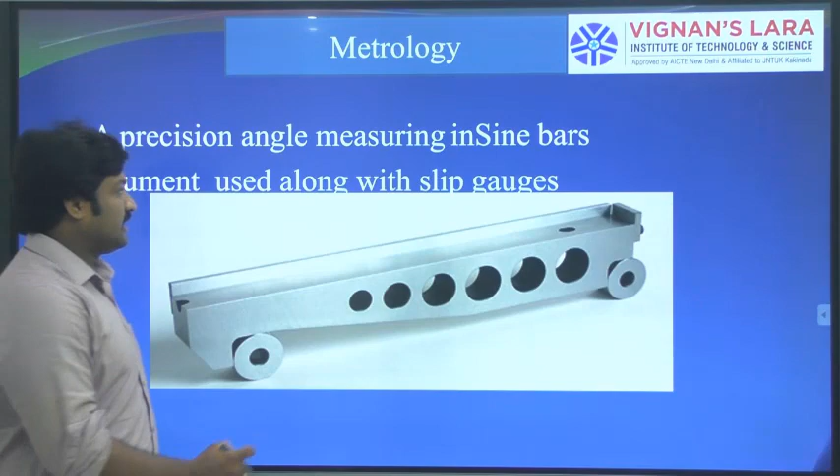This is the upper surface, the surface on which our workpiece is going to be placed, depending upon the application. If the workpiece is small, the workpiece is placed on top of this sine bar.

If the component is big, then we will place this sine bar on top of the component. So depending on the size of the workpiece, the sine bar can be placed on top, or the workpiece can be placed on the sine bar.

This consists of an upper surface, which is smooth, and this upper surface is parallel to the axis of the rollers. These two rollers should be in their axis, and that axis should be parallel to the upper surface. There are also end surfaces and side faces, with the lower surface of our workpiece.

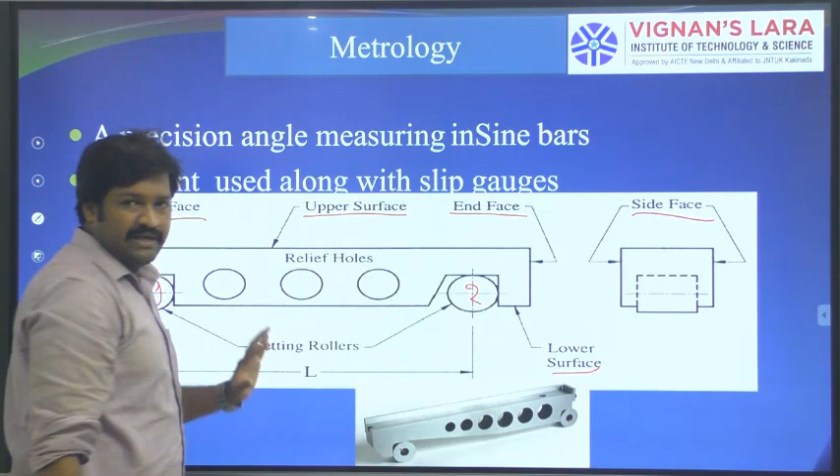So mainly we will focus only on the rollers and the upper surface of our sine bar. The sine bar is a precision angular measuring instrument used for measuring angles and to locate the workpiece or job at a required angle very accurately.

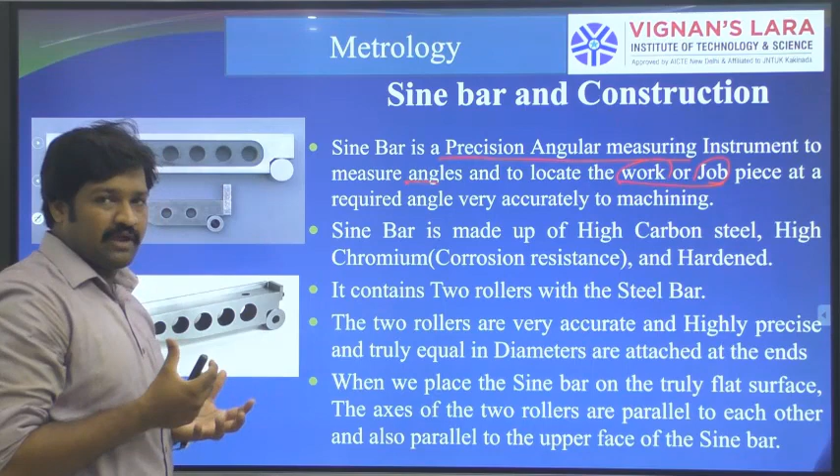Sometimes we need to place our workpiece in tables, meaning vices or clamps. For machining, we need to place our tools as well as workpiece. For setting those jobs, meaning setting up the work pieces, those are to be correctly aligned with respect to angle - that is done by means of sine bars.

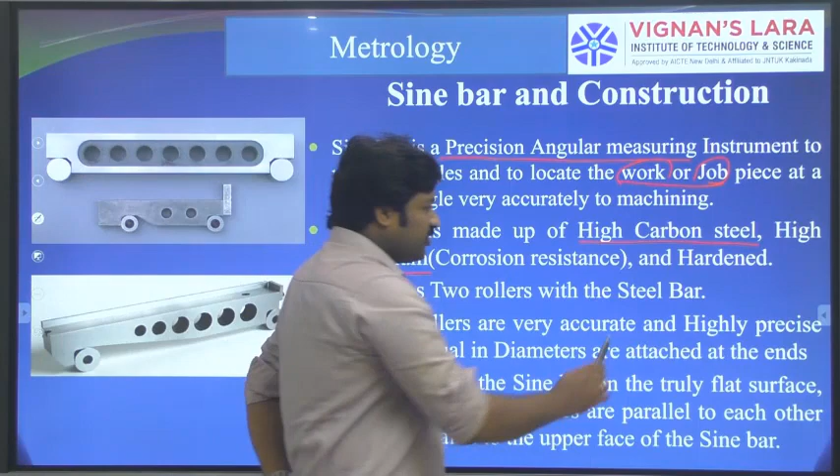So sine bar is made up of high carbon steel, high chromium, and hardened. As we know, if any component is exposed to wear and tear during operation, rubbing action might take place. If our components are exposed to such operations, then we go for heat treatment process, that is hardening process, to improve the wear resistance of the component.

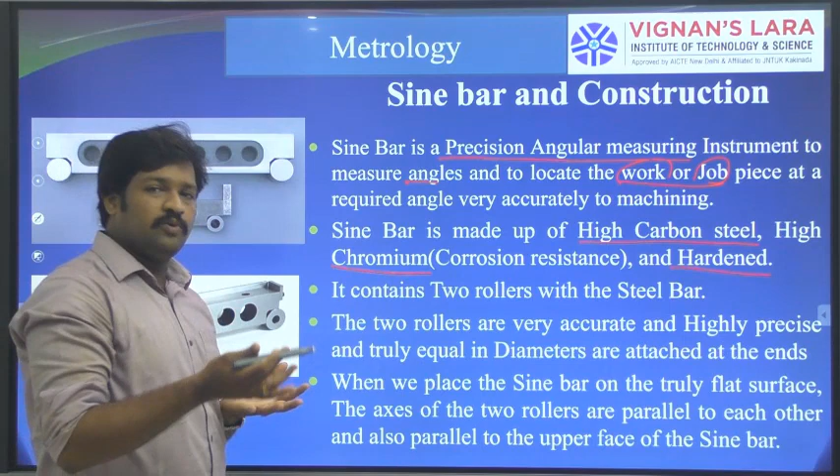And chromium has high corrosion resistance. So to improve its wear resistance, we use these materials. Next, it consists of two rollers, steel rollers on the steel bar.

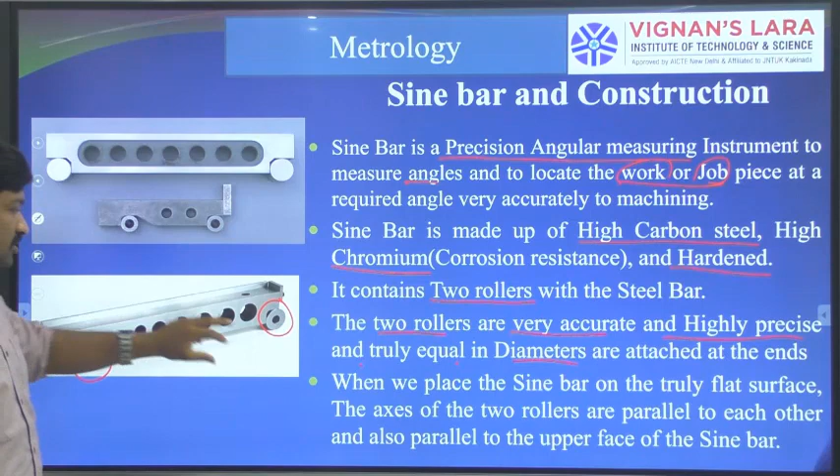The two rollers are very accurate and highly precise, and truly equal in diameter. These rollers can be adjusted depending on the sine bar. So if we are adjusting or replacing the rollers, then the two rollers should be equal - that's the condition.

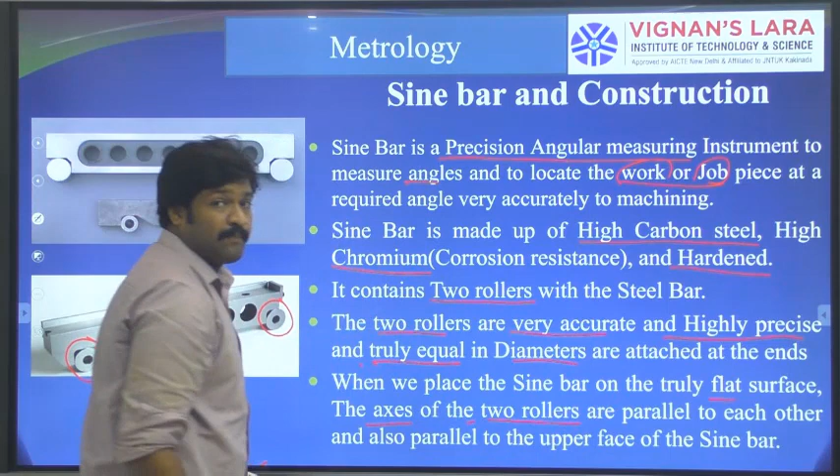So along with being very accurate and precise, they are truly equal in diameter and attached at the ends. These two rollers should have equal diameter. When we place the sine bar on a truly flat surface, the axis of the two rollers are parallel to each other.

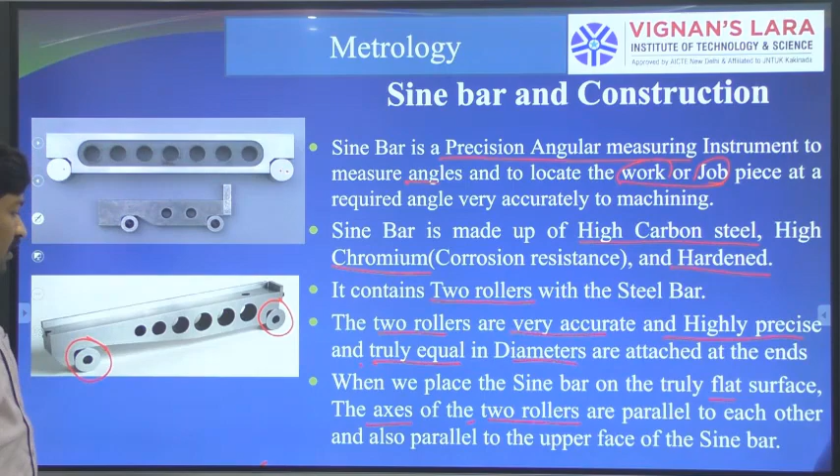So these two axes should be parallel to each other, and along with these two axes, should also be parallel to the upper surface of the sine bar.

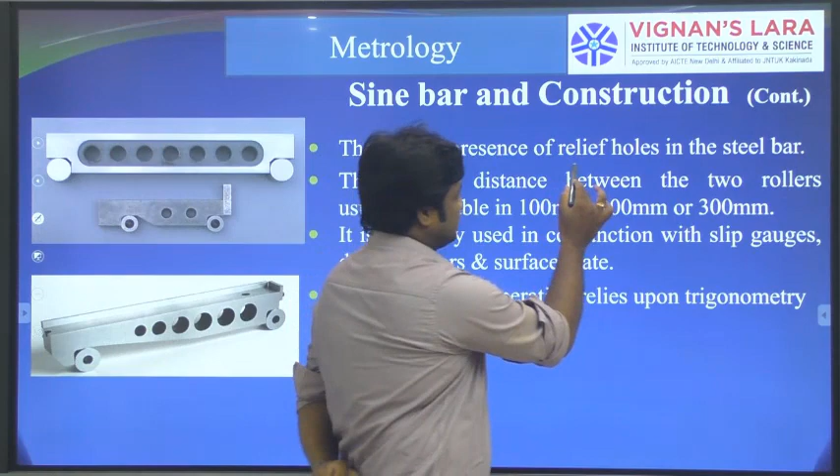There is a presence of relief holes in the steel bar. If you observe, there are some holes. These holes are called relief holes, and the purpose of these relief holes is to reduce the weight of the component.

The purpose of these holes is to reduce the weight of the component. Next, the normal distance between the two rollers is available in 100 mm, 200 mm, and 300 mm.

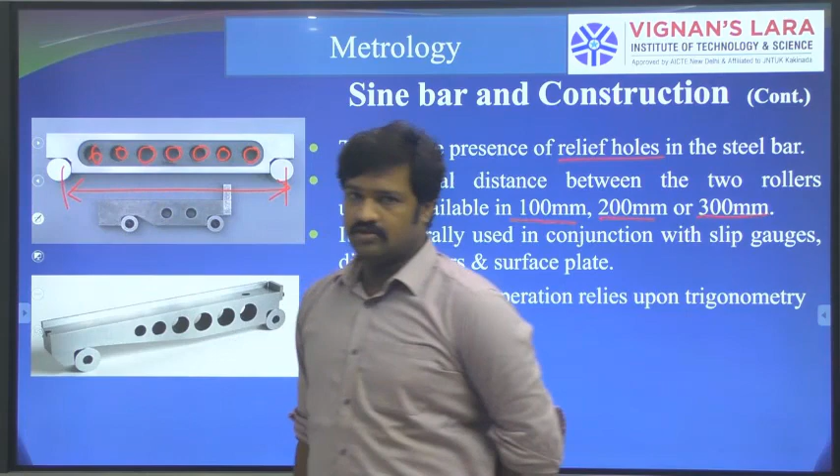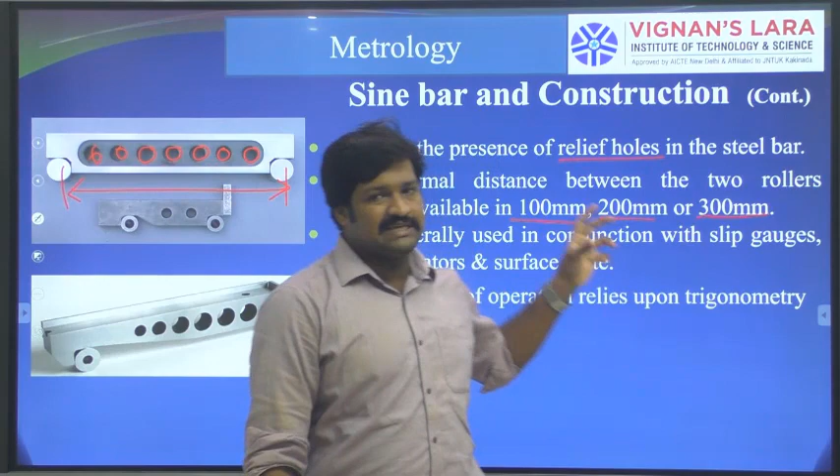The distance between these two rollers is fixed, and those are available in the standard lengths of 100 mm, 200 mm, and 300 mm. Depending upon the application, it means depending upon the size of the workpiece or job, we will select these standard sine bars, whether it is 100, 200, or 300.

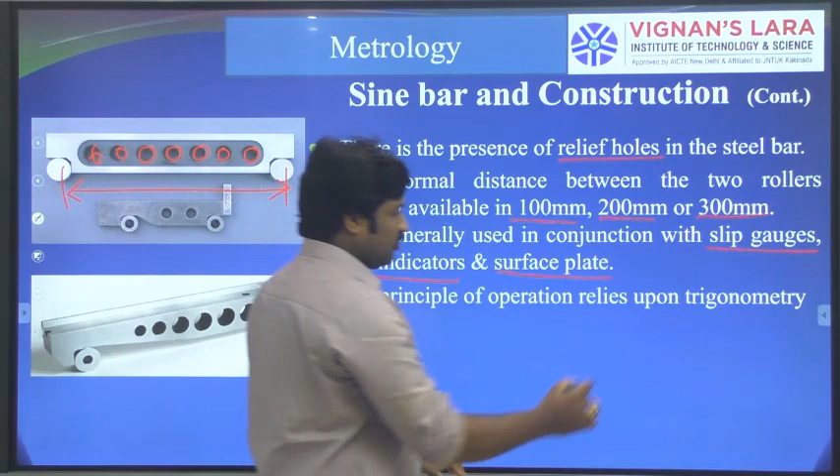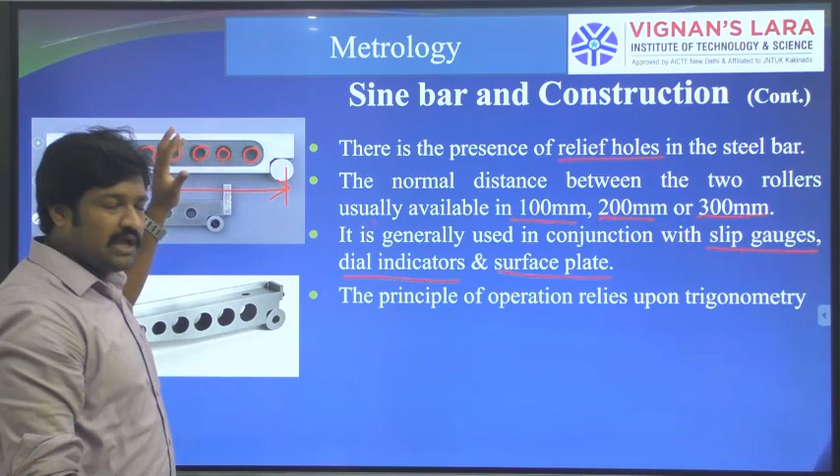Next, it is generally used in conjunction with slip gauges, dial indicators, and surface plates. So if we want to use the sine bar, along with it we need to use these slip gauges, dial indicators, and surface plate also. In conjunction with these slip gauges, dial indicators, and surface plate only, we can measure the angle of the job by means of this sine bar.

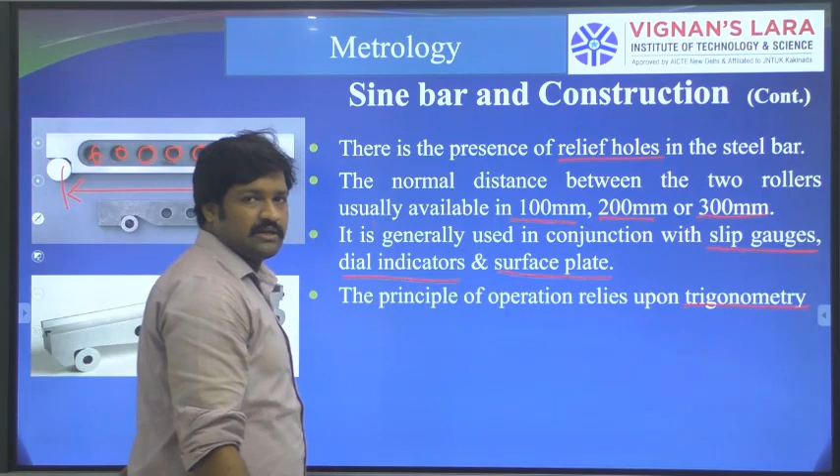The principle of operation relies upon trigonometry. As we know, trigonometry includes sin theta, cos theta, tan theta. So the principle of this operation depends upon these trigonometric equations. The principle of operation of the sine bar is based upon trigonometry.

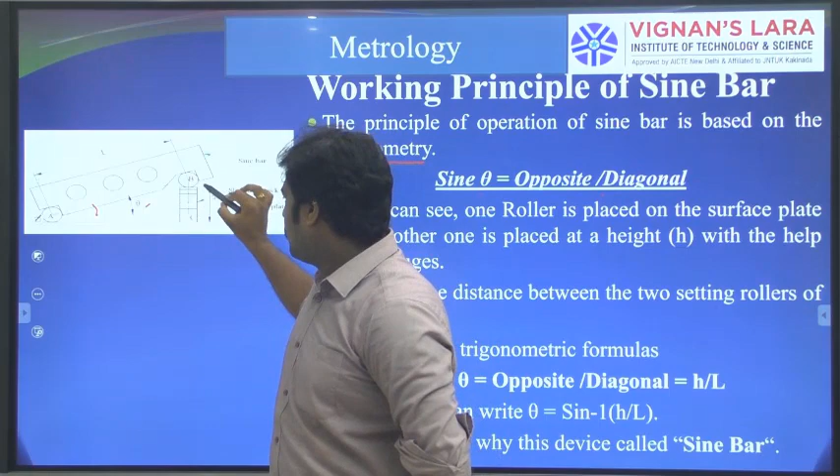That is, sin theta equal to opposite side by hypotenuse. So here, if we want to identify theta, sin theta equals opposite side, that is B to C, which is the distance divided by the length of our sine bar.

The length of the sine bar, L, is fixed. It might be 100, 200, or 300. So L is fixed, and we can select any value depending upon the job: 100, 200, or 300.

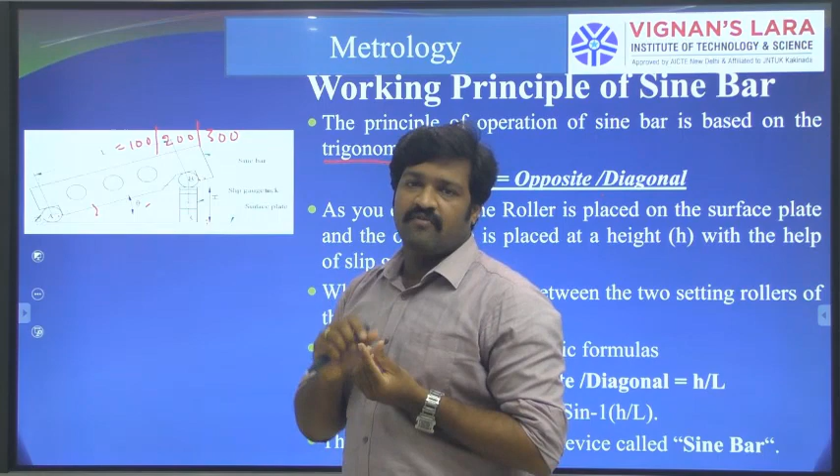The height depends upon the number of slip gauges. This height can be achieved by stacking the slip gauges. As we know, every slip gauge has its number marked, meaning the thickness is marked on one of the faces of the slip gauge. If we join n number of slip gauges, we can sum them all and mention that as the height.

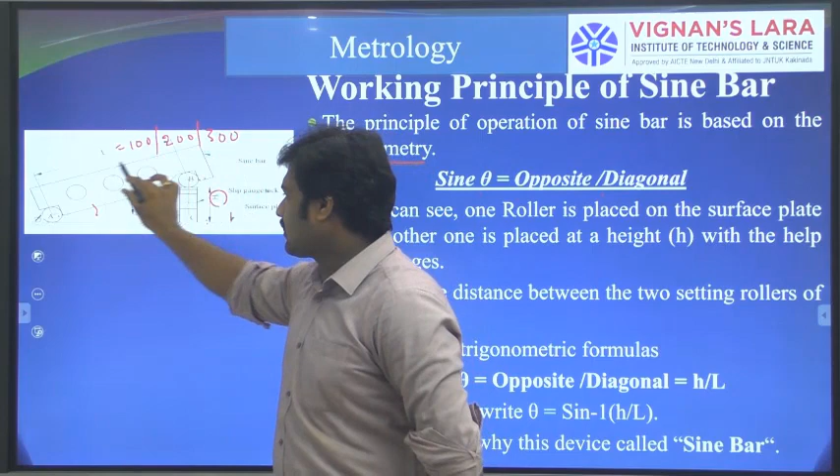Therefore, sin theta equals opposite side, that is the length of the slip blocks, divided by the total length of our sine bar, that is h by L. Sin theta equals opposite side by hypotenuse or diagonal.

As you can see, one roller is placed on the surface plate. Earlier we discussed that the sine bar can be used in conjunction with a surface plate, slip gauges, and dial indicator. We already used slip gauges here for the length, and all these things are placed on a surface plate.

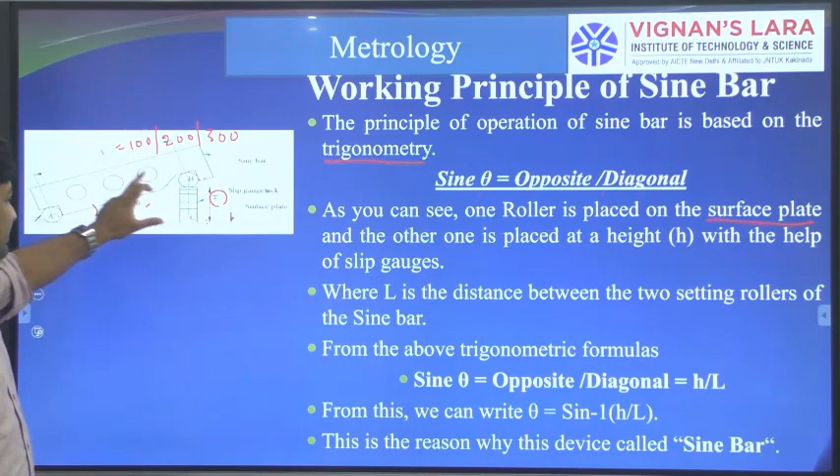One roller is placed on the surface plate and the other one is placed at a height h with the help of slip gauges. For attaining a required height, we use slip gauges, where L is the distance between the two setting rollers of the sine bar. From the above trigonometric formula, sin theta equals opposite by hypotenuse, that is equal to h by L. From this we can write theta equals sin inverse of h by L.

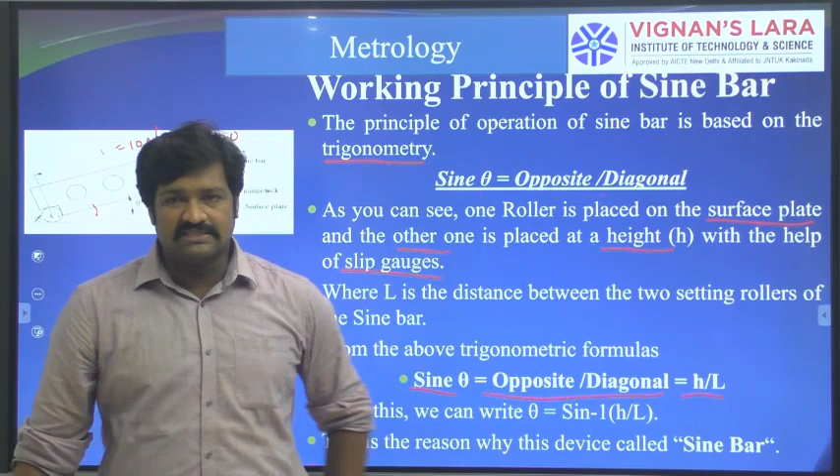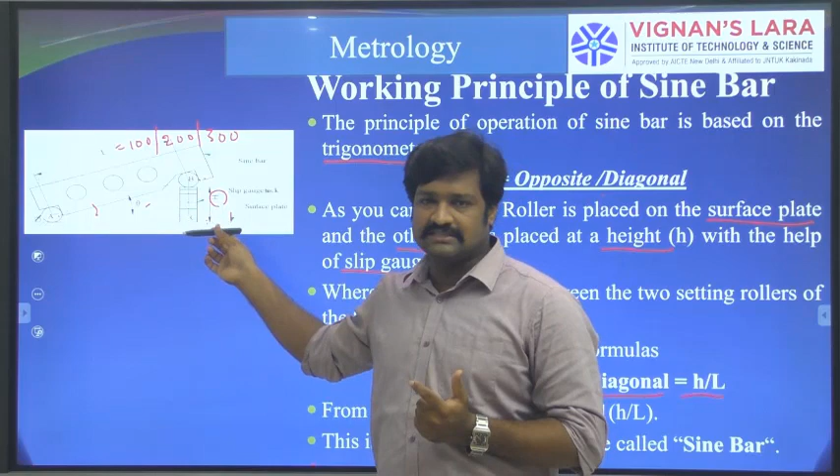This is the reason why this device is called a sine bar. By means of the trigonometric equation sin theta, we are calculating the angle of our workpiece with the help of slip gauges. So since we are using the trigonometric equation sin theta, the instrument is called a sine bar.

Next, the working principle of the sine bar. For checking unknown angles of a component, a dial indicator is moved along the surface of the work. One of the rollers is placed or mounted on the surface plate, and one is mounted on the slip gauges. So this is a set of slip gauges, and here this is the surface plate.

On the top of the surface plate one roller is mounted, and on the top of the slip gauges we placed one more roller. On the top of the sine bar we placed the workpiece. So we need to increase the height of the slip blocks so that the sine bar can be tilted until the dial indicator on top shows 0 indication.

Earlier, if the sine bar is at rest, the workpiece has some inclination, meaning a tapered angle. If we place the dial indicator on top of the workpiece, it shows some deflection. If we move further, it shows negative deflection. So the deflection varies from one part to the other.

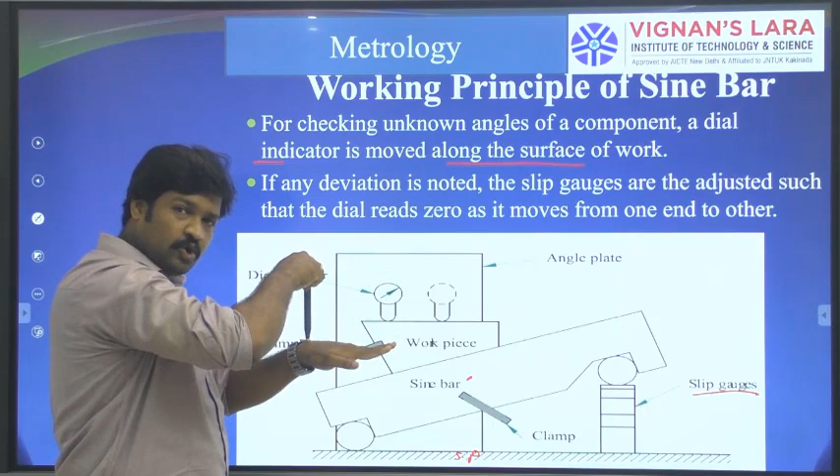So we need to raise this end. The workpiece should be raised until the deflection of the dial indicator is 0. If we move the probe of the dial indicator, it should show the same reading, meaning 0. Here is the probe, or stylus, of our dial indicator.

If you move this probe on the surface of the workpiece, it should show 0 deflection. From here to here it should show the same deflection. Then only our workpiece is parallel to the surface plate. If it is parallel to the surface plate, then we take this as the height of our component.

So these are the slip gauges. This height of the slip gauges can be varied, increased until the workpiece surface is parallel to our surface plate. So the surface plate is parallel to our workpiece. Until the workpiece surface reaches parallelism, we need to increase the height of the slip gauges.

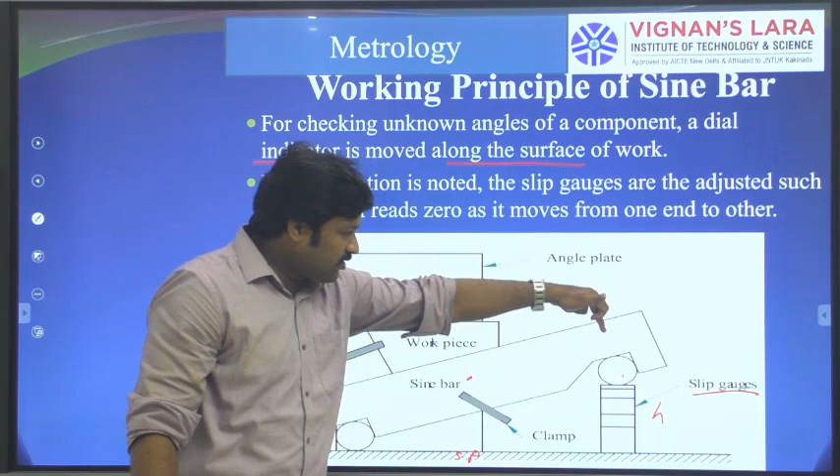Ultimately, after getting the 0 reading on the dial indicator, we note down the height of the slip gauges and the length of the sine bar, so that we can get the angle of our workpiece.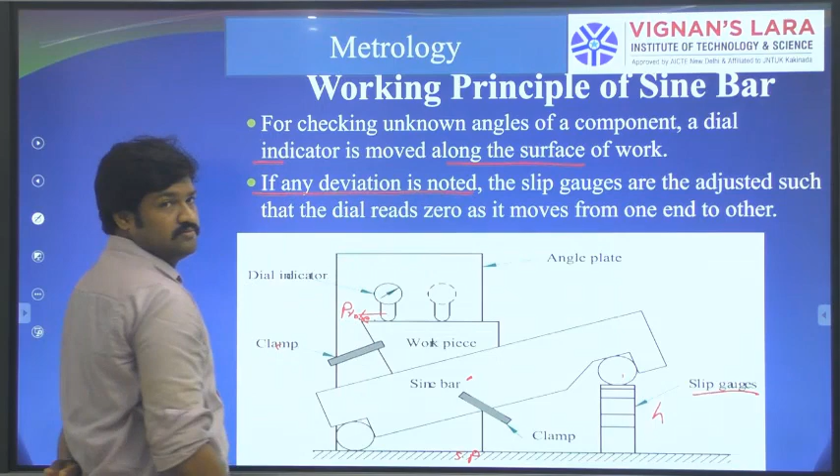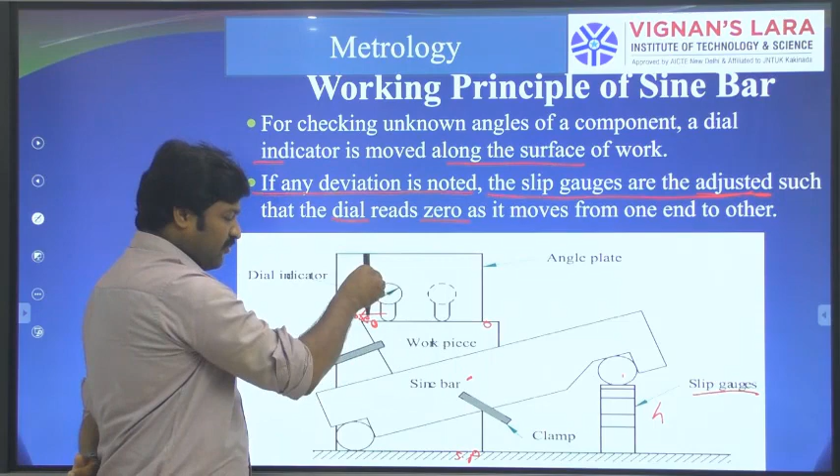So for checking the unknown angle of a component, a dial indicator is moved along the surface of the work. If any deviation is noted, the slip gauges are adjusted such that the dial indicator reads 0 as it moves from one end to the other. If we move the probe from this direction to that direction, it should show the same deflection, that is 0. If it is showing 0, then only we can take the length of the slip gauges.

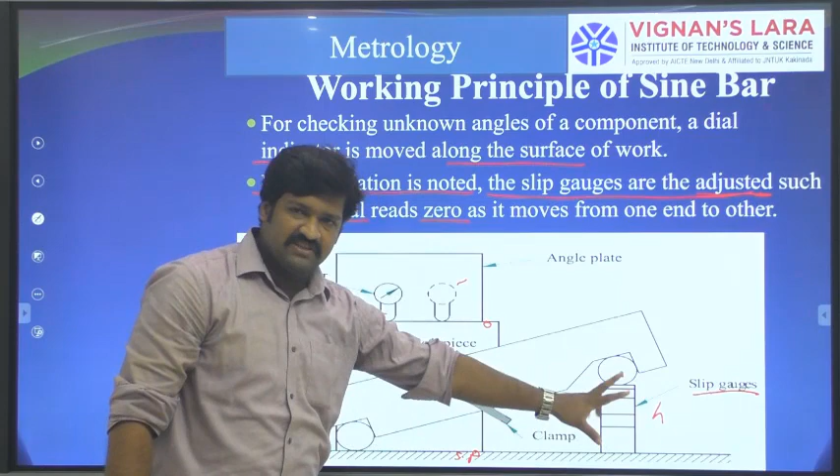If it is not showing 0, meaning if it shows any deflection, we need to vary the height of the slip gauges so that we can get the 0 reading on the dial indicator.

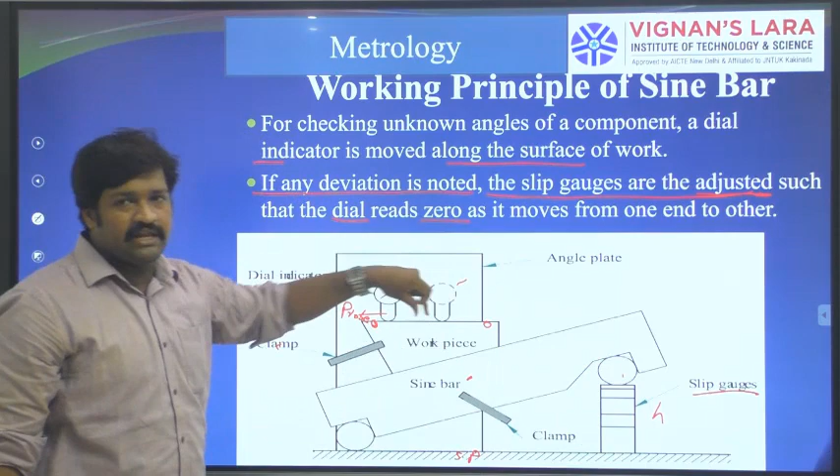So this is the schematic. The dial indicator is mounted by means of a stand, and the dial indicator can be moved on the surface of the part so that we can get the angle of the component.

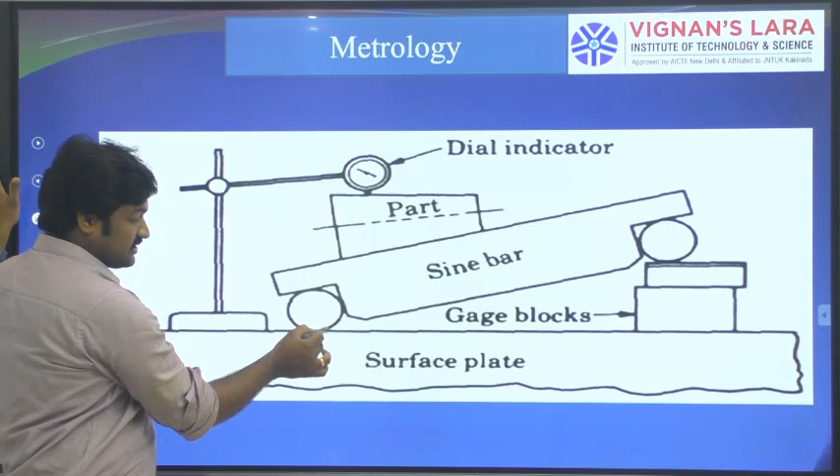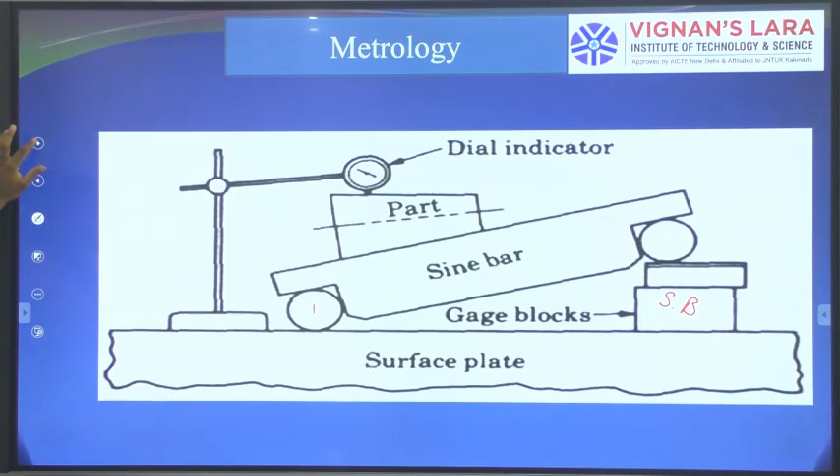So here, on top of the surface plate one roller is placed, and on top of the slip gauges, or slip blocks, another roller is mounted. This is the actual diagram. This is the taper angle we need to identify.

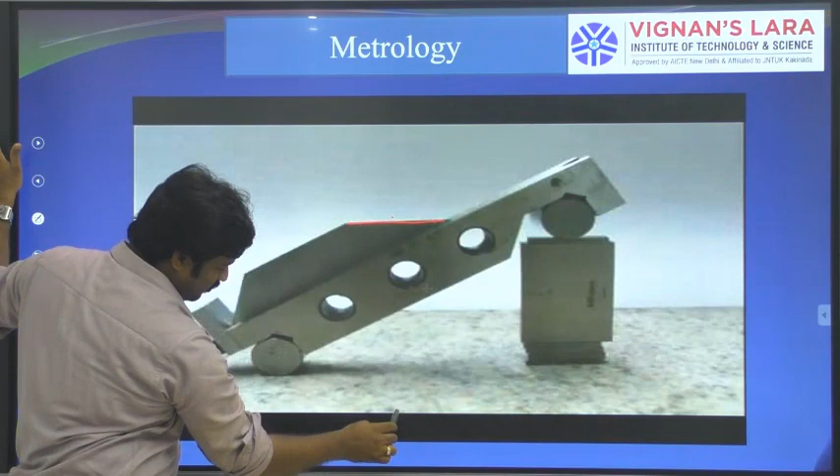We increase the height of the slip gauges until this surface is parallel to our base. Here is our surface plate; it should be parallel to our component. Until then, we raise the height of the slip gauges.

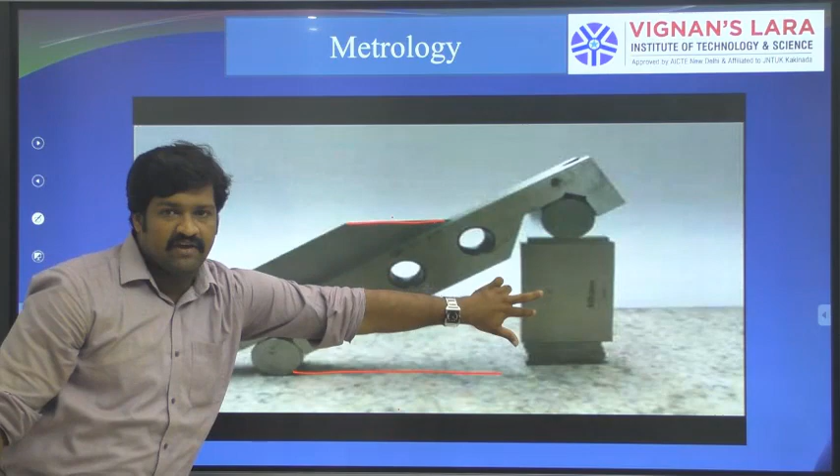Next, working when large components need to be measured. So far we discussed that if the workpiece is small, we place it on top of the slip gauge. Now, if the component is big, meaning the workpiece is large, we place the sine bar on top of the workpiece instead. Here we observe that the sine bar is reversed, so we place the sine bar on top of the workpiece.

So on top of the workpiece we place the sine bar, and we identify the height of this roller from the surface. From this surface we identify the individual height of these rollers, and from here to here, the height of the rollers, by means of vernier height gauges.

In case of large components, the sine bar is placed over the component, as the component cannot be placed over the sine bar. This is because the sine bar has standard lengths, that is 100, 200 or 300. So up to 300 of dimension the component can be placed on the surface of the sine bar. If the dimension of the component is more, we replace the workpiece with the sine bar.

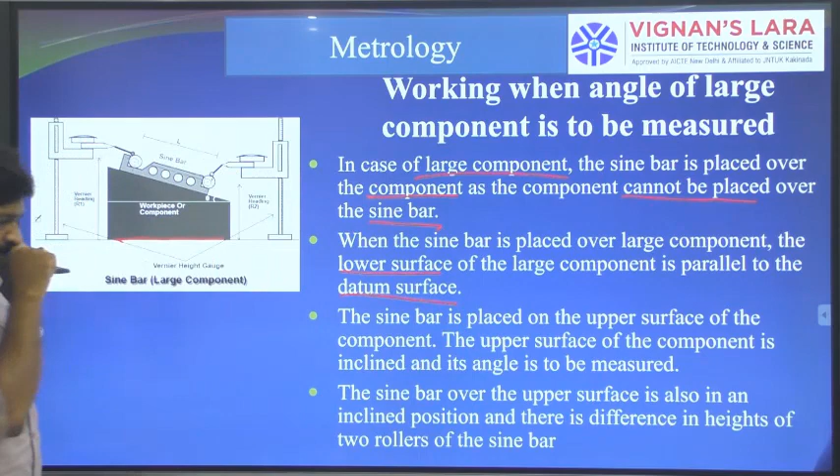We place the sine bar on top of the workpiece. When the sine bar is placed over the large component, the lower surface of the large component is parallel to the datum surface. This is the lower surface of our workpiece, and it is parallel to the datum surface.

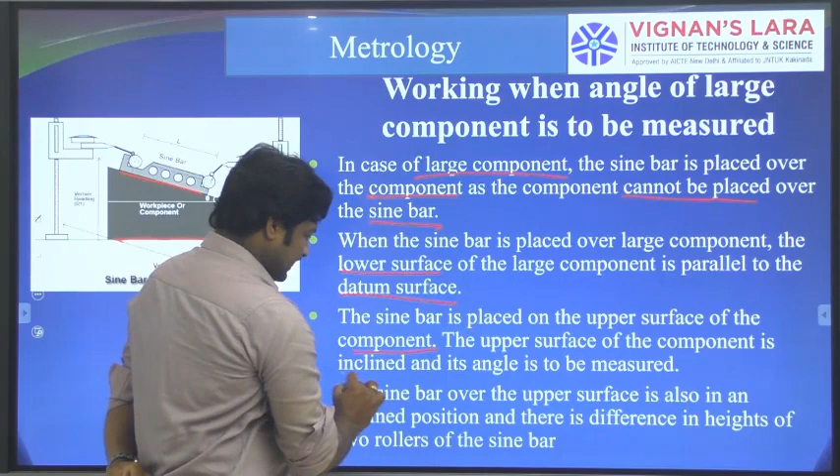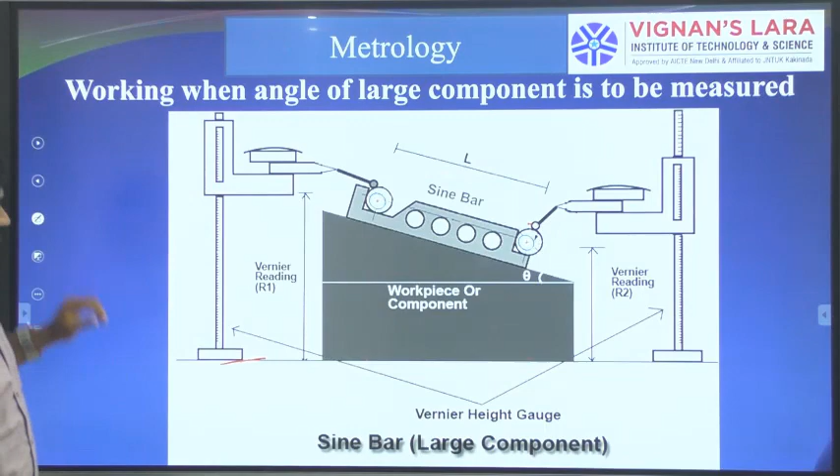Next, the sine bar is placed on the upper surface of the component. The upper surface of the component is inclined and its angle is to be measured. We need to identify this angle theta, the upper angle of our component.

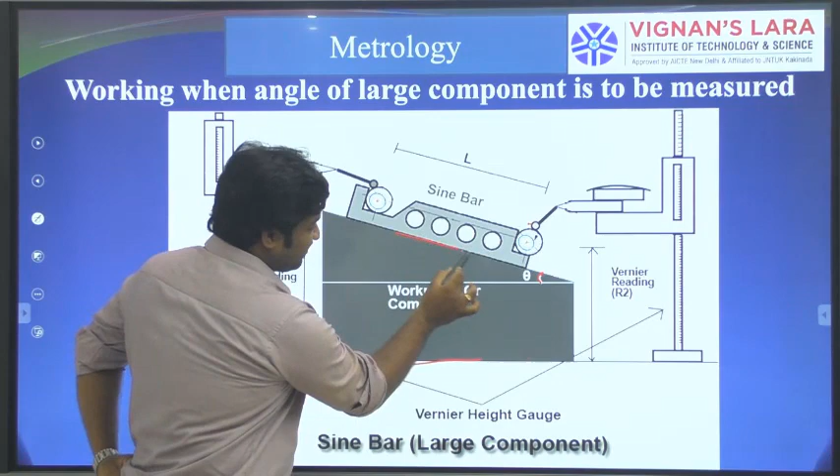This is the lower surface and it is parallel to our datum line, and this is the upper surface of the component on which our sine bar is placed.

The sine bar over the upper surface is also in an inclined position. Earlier our sine bar was constant; on top of that we placed a workpiece. After that we tilted our sine bar.

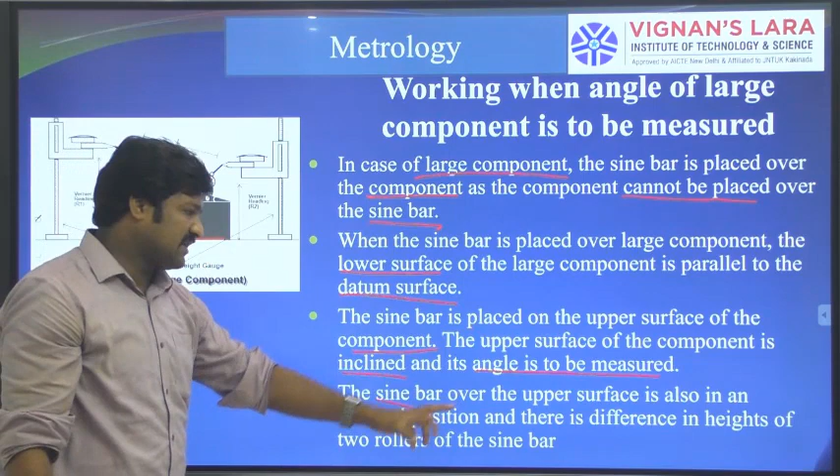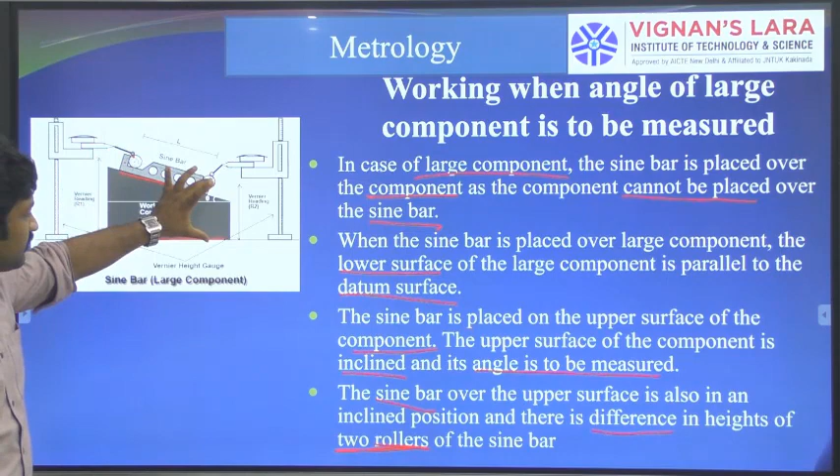The sine bar over the upper surface is in an inclined position, and there is a difference in heights of the two rollers. The heights of the two rollers vary from the datum surface - from here to here the height is different, and from here to here it is different.

Next, the height of the two rollers is measured using a vernier height gauge. By means of the vernier height gauge, we measure the height of the rollers from the datum surface, and the height of the two rollers is written as H1 and H2.

Here the height H1 is more than H2 - from here to here this is H1 and from here to here it is H2. The difference in heights H1 and H2 is the rise of the sine bar. So H1 minus H2 is the difference between the two rollers, that is the height of our sine bar, H equal to H1 minus H2.

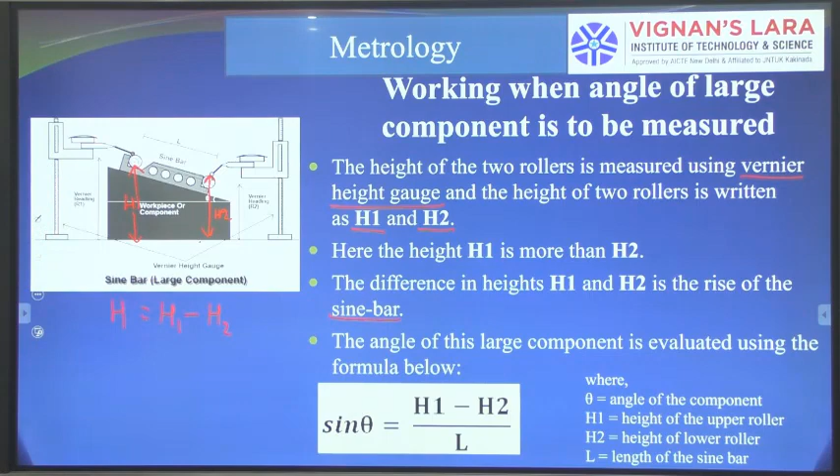So the angle of the large component is evaluated using the formula sin theta equal to H1 minus H2 by L. As we know sin theta equal to H by L, H equal to H1 minus H2, where L is the standard length of the sine bar.

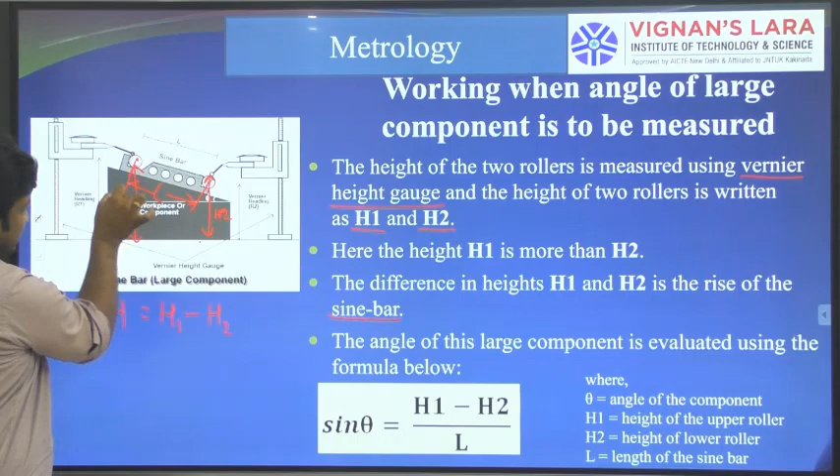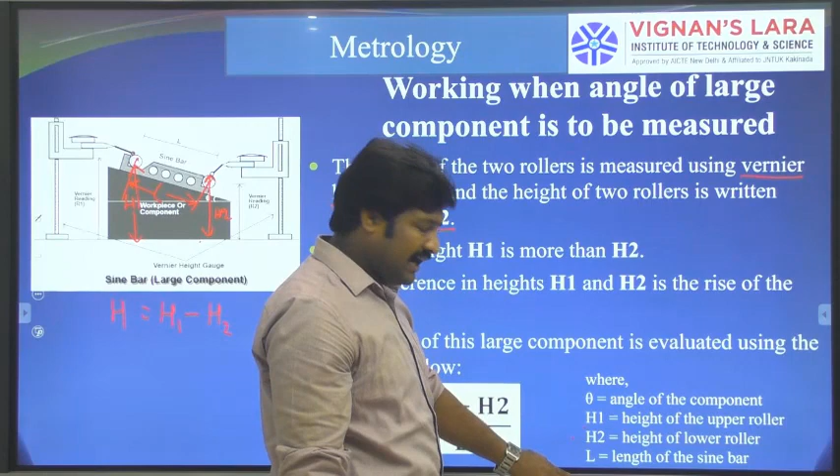Here theta is the angle of the component, H1 is the height of the upper roller, H2 is the height of the lower roller, and L is the length of the sine bar. By means of this formula, we identify the angle of larger components.

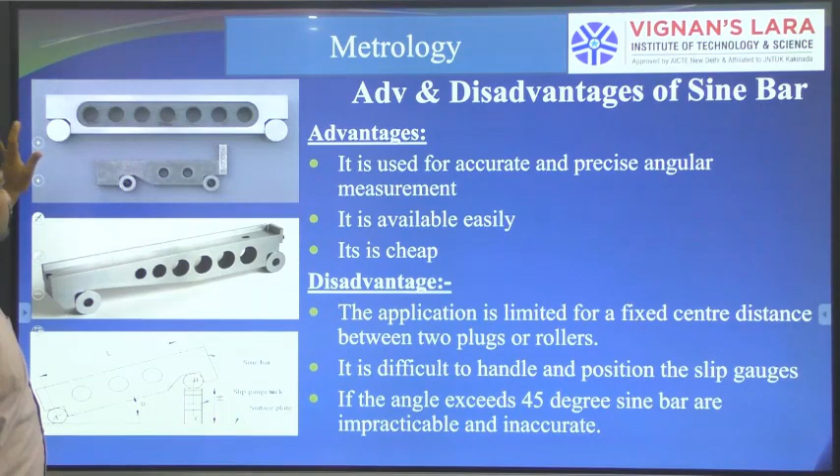So, advantages of sine bars: it is used for accurate and precise angular measurement. Compared to earlier instruments, this sine bar is used for checking as well as for arranging a proper angle with higher accuracy and higher precision.

It is easily available, meaning it is available easily. It is also very cheap. Next, disadvantages.

The application is limited to a fixed center distance between the two plugs or rollers. So the distance between two rollers is fixed - it might be 100, 200 or 300. The distance between the two rollers is fixed.

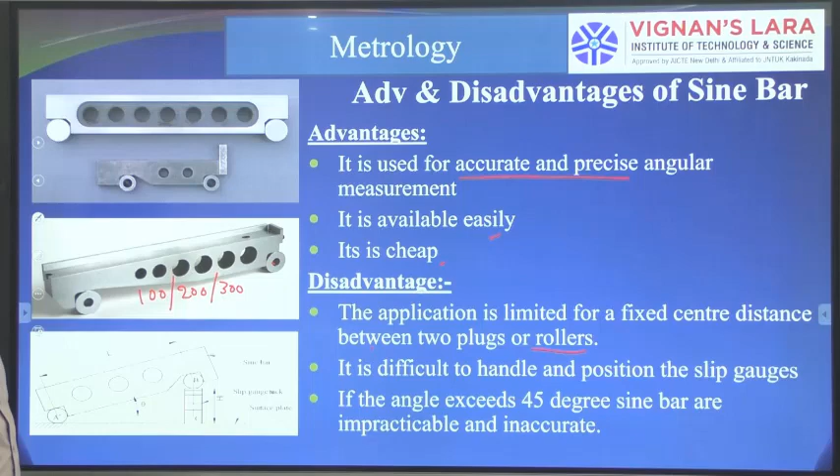It is difficult to handle and position the slip gauges.

As you know, for joining the slip gauges we need to follow a procedure called the wringing procedure. So we need to change the slip gauges depending upon the angle. Frequently we need to adjust the length of the sine bar and the slip gauges to get the deflection to zero. For that purpose, we need to frequently change the lengths of the component. It is very difficult to adjust those slip gauges.

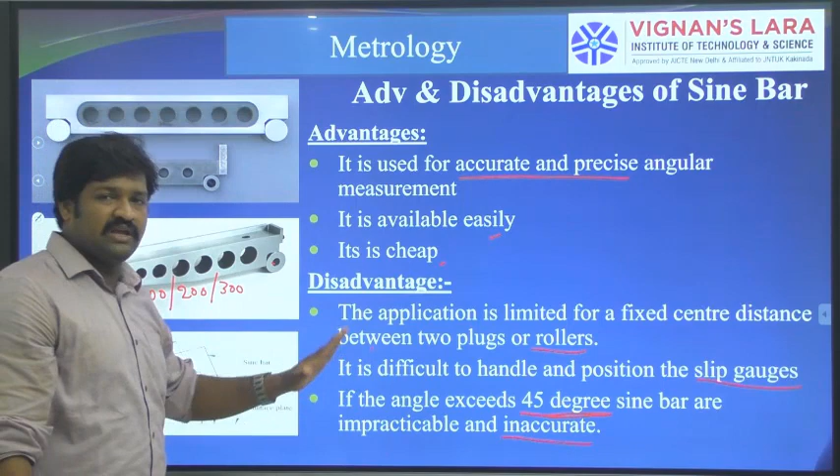Next, if the angle exceeds 45 degrees, the main limitation is that the sine bar becomes impracticable and inaccurate. So only up to 45 degrees can we measure the angle with high accuracy, whereas if it is more than 45 degrees, it is very difficult to handle the sine bar.

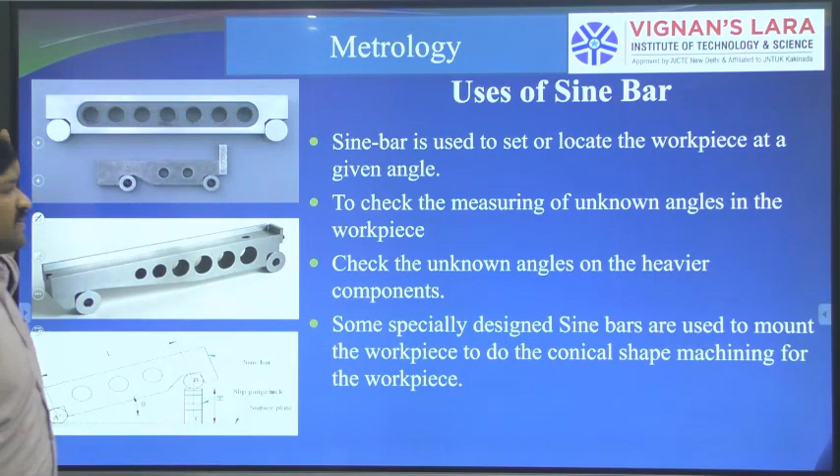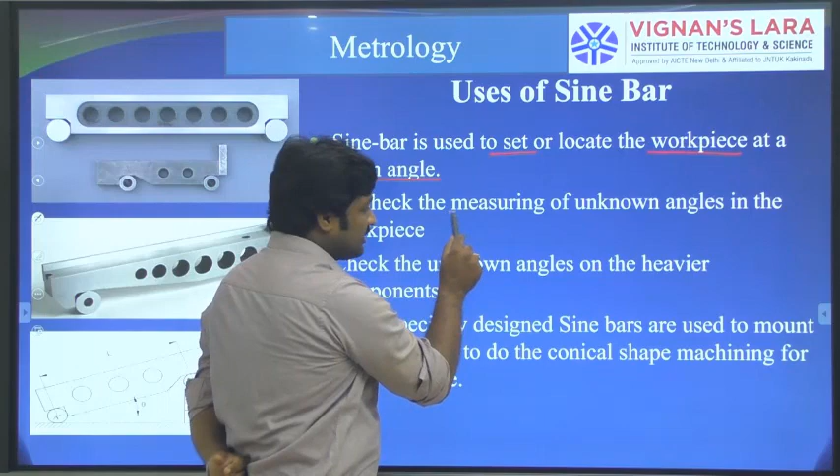Next, uses of sine bar. Sine bar is used to set or locate the workpiece at a given angle, and also to check or measure unknown angles in the workpiece. So it is used for setting the angle of the workpiece, or also for measuring unknown angles. Both the things are possible. It can be used for measuring as well as for setting.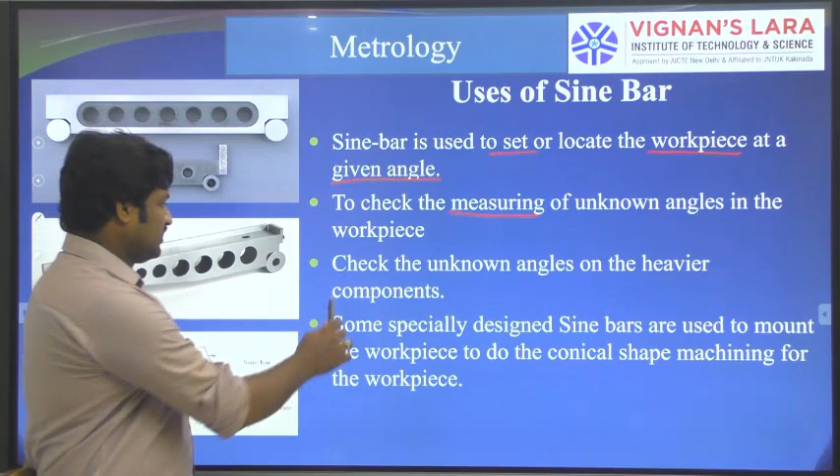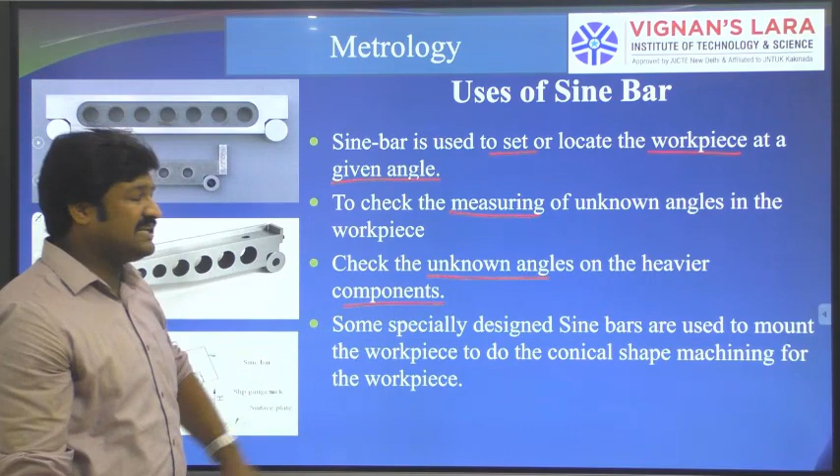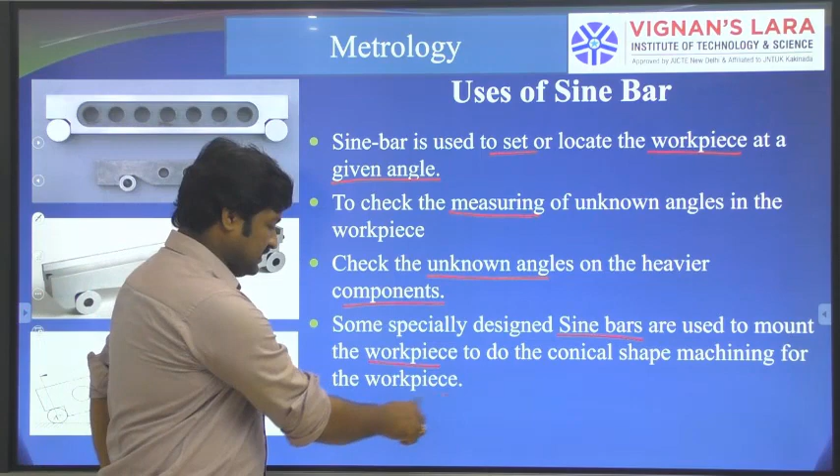Next, it is used for checking the unknown angles of heavier components. So smaller components as well as heavier components can be identified, meaning they can be marked as well as checked. Some specially designed sine bars are used to mount the workpiece to do conical shape machining for the workpiece. So here we are setting the component.

Next, sine centers. Sine bars are basically used for flat surfaces. So if the component is cylindrical or conical, it is very difficult to place the component on top of the sine bar, because due to the conical section the component might tilt or move away. For that purpose, we use sine centers.

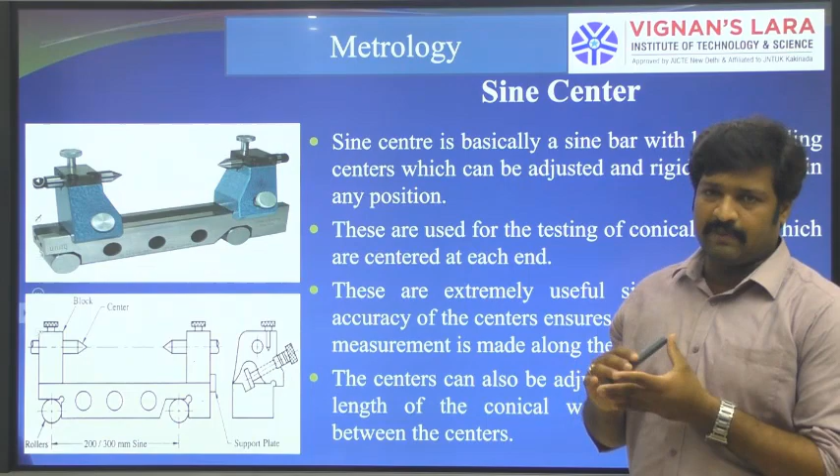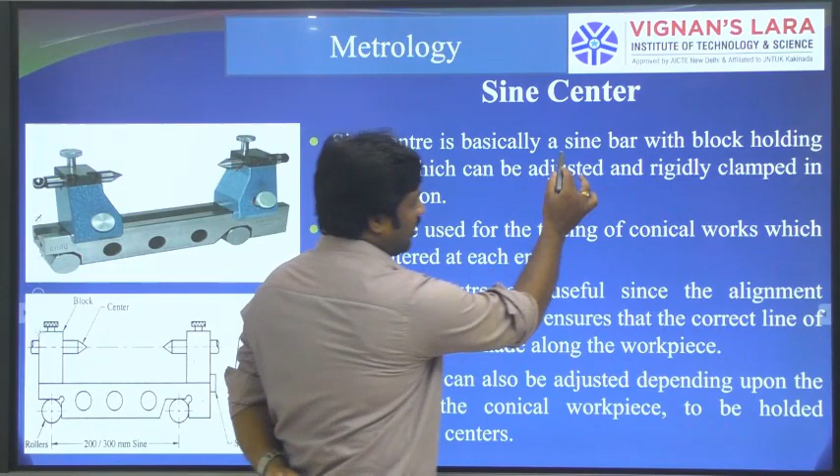Sine center, in addition to the sine bar, has two adjustable centers. So it consists of two adjustable centers. Sine center is basically a sine bar with blocks holding centers. It has centers C1 and C2, which can be adjusted and rigidly clamped in any position.

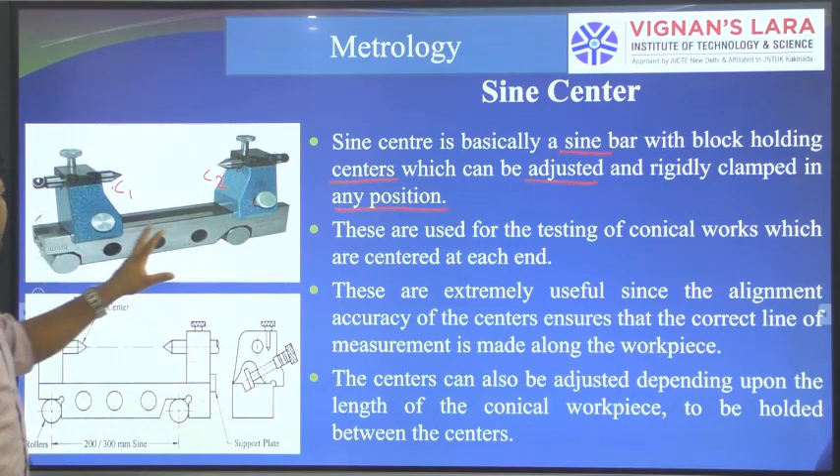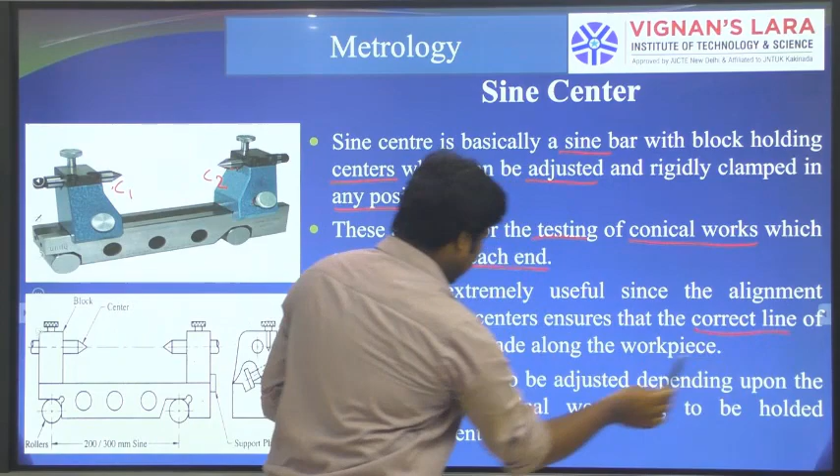So in any position this can be clamped, meaning these centers can be moved along the length of the sine bar. These are used for testing conical works which are centered at each end. Conical components are not easily held on a regular sine bar, so for that purpose we use these sine centers for holding conical sections. These are extremely useful since the alignment accuracy of the centers ensures that the correct line of measurement is made along the workpiece.

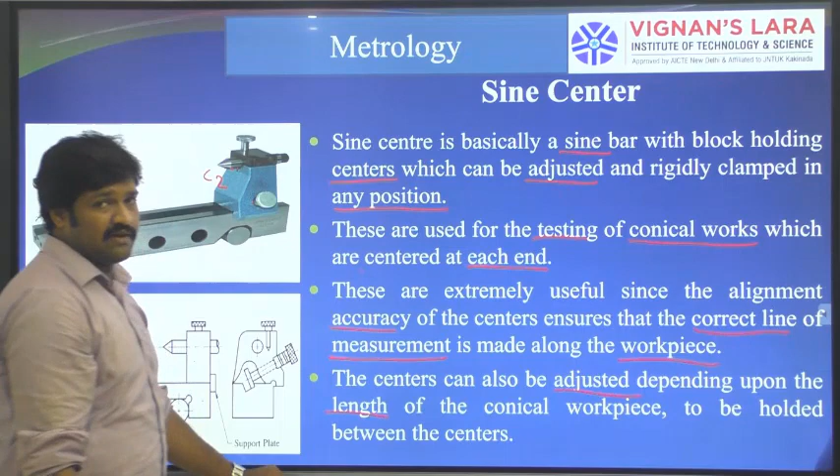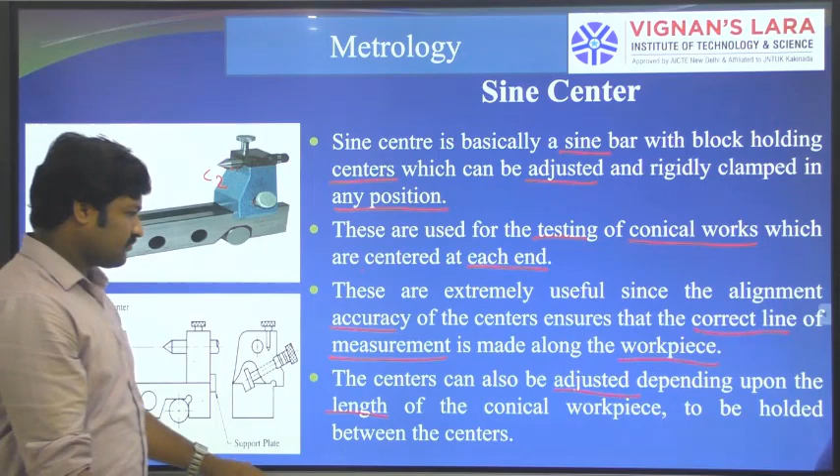So if we hold the component between these two centers, the axis is uniform, and due to this correctness the results are also very accurate. The centers can also be adjusted depending upon the length of the conical workpiece, so it can be held between these centers. This is the schematic of our sine center.

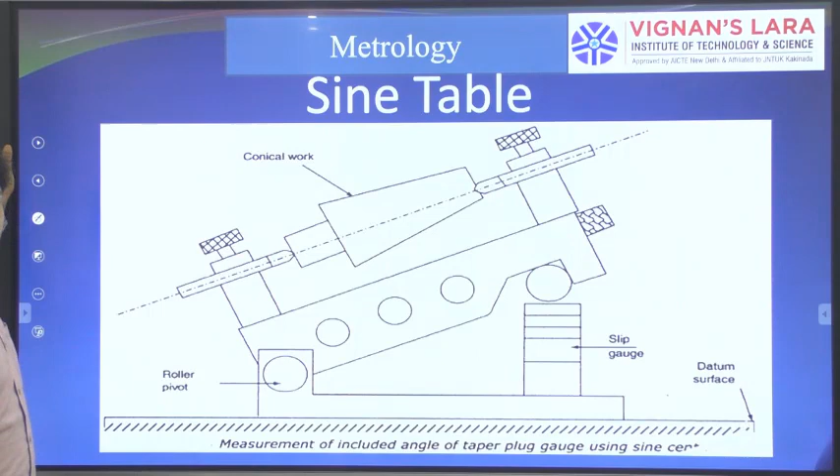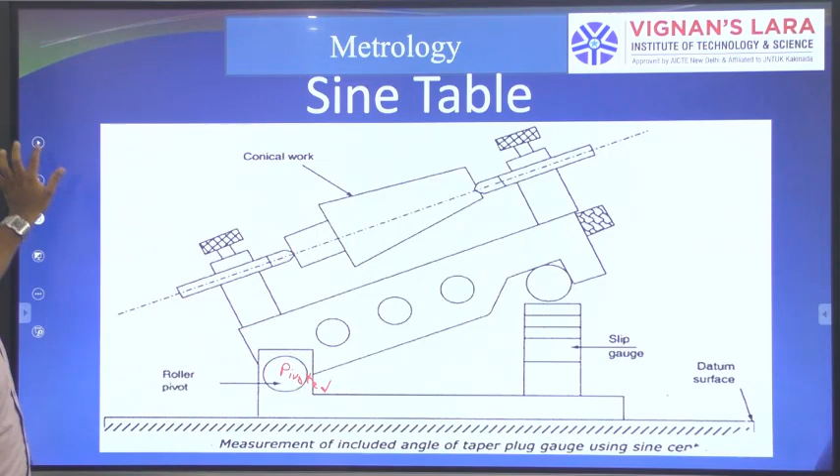Next, sine table. Along with sine centers, it consists of a rigid table. Until now we used sine centers or sine bars on top of a surface plate, but now the sine table itself consists of a table, with one of the rollers pivoted at one end, giving us a rigid table. This is the schematic of our sine table.

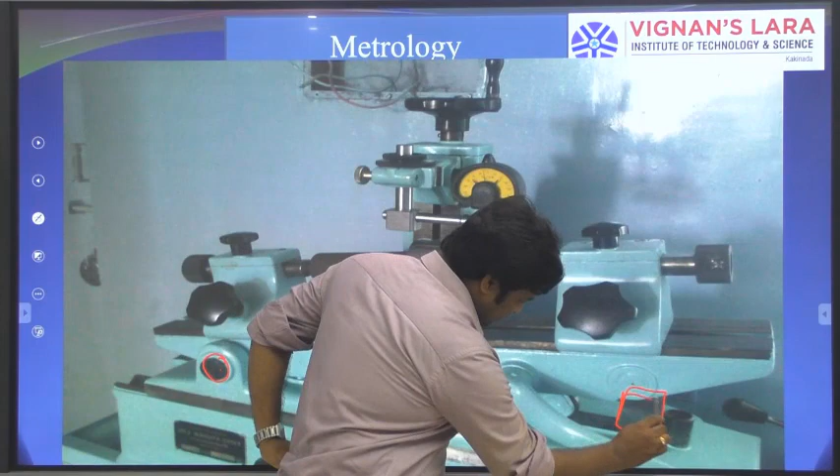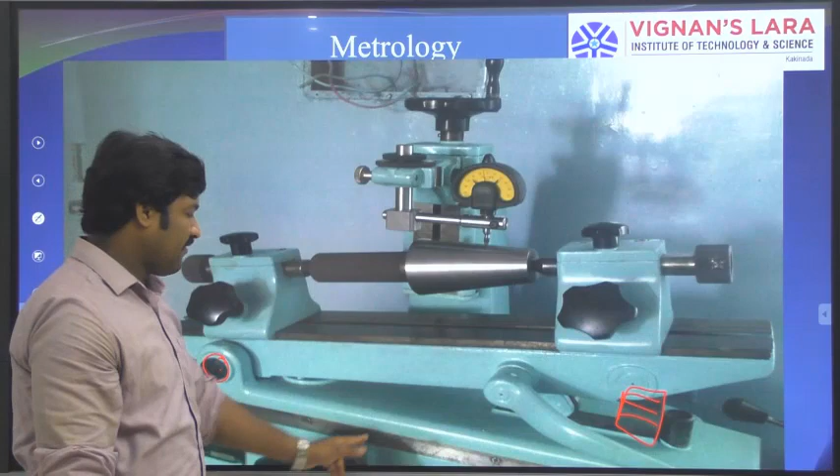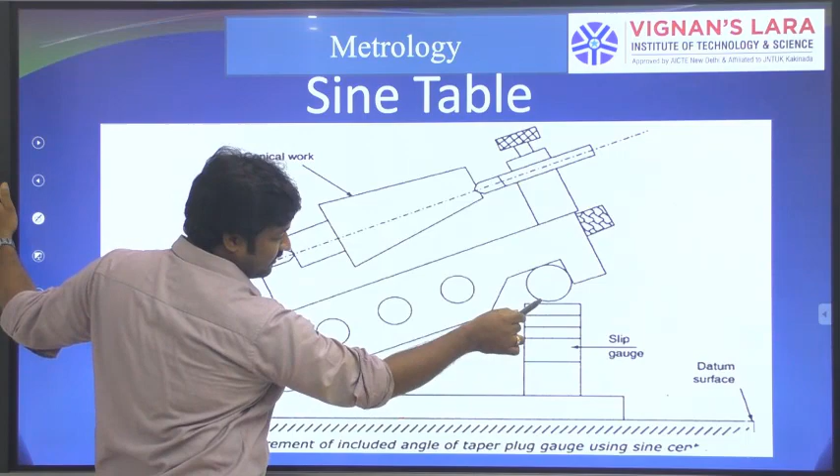One of the rollers is pivoted here, and on the other side we place a number of slip gauges to increase the height of the table, so that the conical section can be parallel to the surface of our table. This component should be parallel to this, so until the required height we need to add these slip gauges.

So these are the sine bars, sine centers, and sine tables. For measurement of angle we use sine bars, and for measurement of conical or cylindrical sections, meaning taper components, we use sine centers.